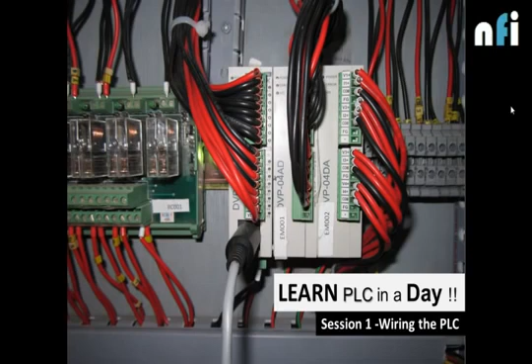Okay, so welcome to the Learn PLC in a Day session 1, which is wiring the PLC. In this session, we are going to learn about how to wire a PLC. Now, when we are going to install a PLC in any panel or in any machine or in any process, first we have to wire it up. So we'll understand how to wire a PLC, which wires are to be connected where.

So very quickly, let's understand the basic components of a PLC. Now, in front of the screen, you can see this is a PLC by the company Delta Electronics, and we have some input terminals. These are the terminals onto which we'll be connecting the inputs. Now what are the inputs? Inputs can be switches, sensors, a limit switch, any source of inputs, and it can be any sensor.

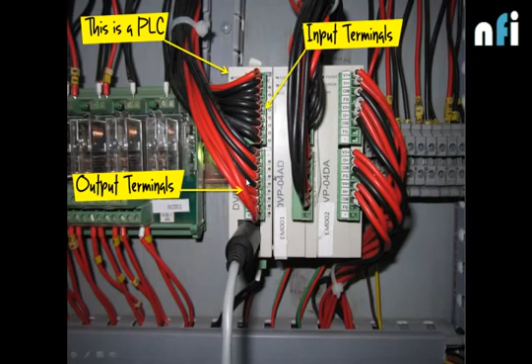Then we have the output terminals. You can see here, these are the output terminals onto which we'll be connecting the outputs. Now what outputs and what inputs there can be in any machine depends on the various processes. For example, suppose you're going in a lift. What you do, you push a button. That button is your input. That button tells the machine, the process, or the lift which floor you want to get to.

So that movement of the lift is due to the motor. That is your output. So you understand that the button is the input which will be connected to the input terminals, and the motor will be connected to the output terminals. But what happens inside is the program, how that controller has been programmed.

In a similar way, we will program this PLC using this programming cable. Now, that's the programming cable. We have to make a program in the computer, then we have to download that into this PLC, where it will remain stored. So it's all about programmable logic controller. That's what PLC stands for. Programmable logic controller. A controller which can be programmed using various logics.

Logics can be if, else, or, and, not. So that's the logic which we are using in our day-to-day life. The similar logic we can program in a PLC. Now let's see the components. We have RS485 terminals over here. This terminal is used to connect this PLC to an HMI or any other communication source so that we can communicate what's happening inside a PLC.

Then we have the D to A card. This is a digital to analog card, which converts digital data into analog signals. In this case, digital data can be binary bits. These binary bits can be converted into analog voltage, which can be further used to drive different analog outputs. Then we have the A to D card, which is analog to digital conversion. Analog signals can be given by some analog sensors.

So I'll show you another PLC from the company Siemens, with the code S7-200 CN. Similarly here we have the power, 24 VDC, which will be used to run the PLC. Then we have input terminals as we have in Delta. These are the output terminals. Then we have this programming cable which is used to program the PLC. And then a small battery. This battery is used to store the information, to store the program in case of power failure.

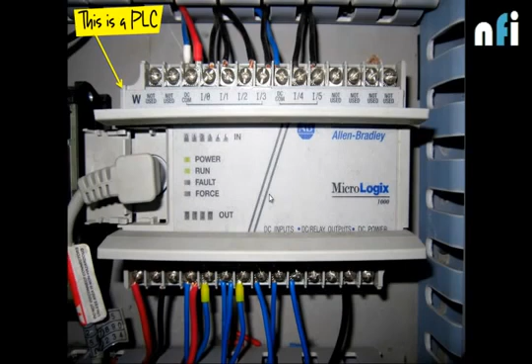Now, another PLC from the company Allen Bradley, MicroLogix 1000 is the code. Similarly, we have input terminals here, output terminals here, and again a programming cable to program the PLC. Then the power of 24 VDC, which is used to run the PLC. Now you can see some indications here. The PLC is on, you can see a green light. When it is running, you will see a green light again. When it has some fault, there will be an orange light over here.

And when there is a forced input, in which we are driving the input from inside the software instead of switches, there will be a force light here. So these are the basic components of what a PLC is all about.

Okay, so this is the software in which we are going to learn about how to wire a PLC. This software is Automation Studio by the company Famic Technologies, which is in Canada, and this software is being used in our academy to teach the students how to do the electrical wiring, how to make sophisticated circuits, and how to test and simulate them, so that after making circuits in this software, we implement them practically.

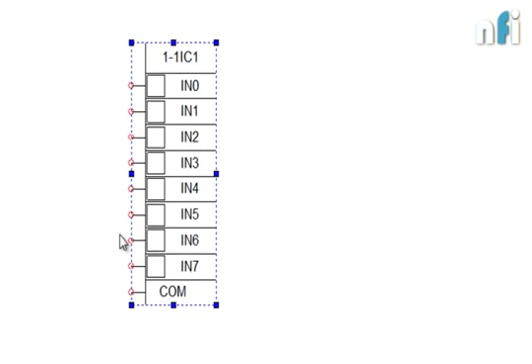So let's take some PLC cards. This is my PLC input card. It is analogous to the input terminals which you have seen in that presentation. So let's take some power sources. Now this PLC I assume is running on 24 volts. So I'll take 24 volt and I'll take 0 volt. Now as this is the software, there is no need to connect power sources to this PLC. These will be connected internally by the software. But we have to provide voltage to drive the inputs.

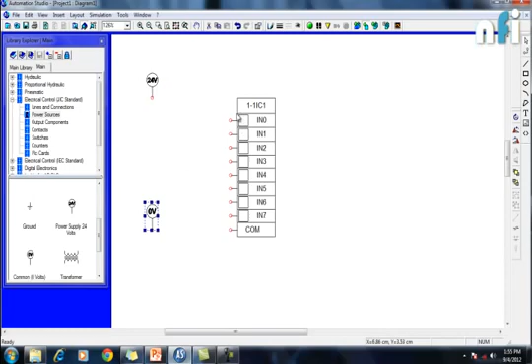So first understand how this input will be run, how they will indicate that there is some voltage or some physical activity outside this PLC. You can see a common terminal here. Now I'm going to connect this 0 volt to this common, like this. So my 0 volt has been connected to common. Now, you have to understand that we need to create a potential difference of 24 volt across these input terminals. Only then will this PLC recognize that there is some input.

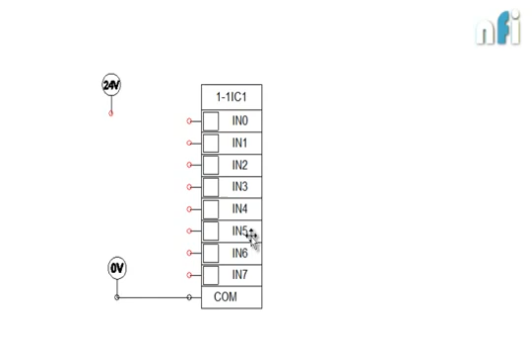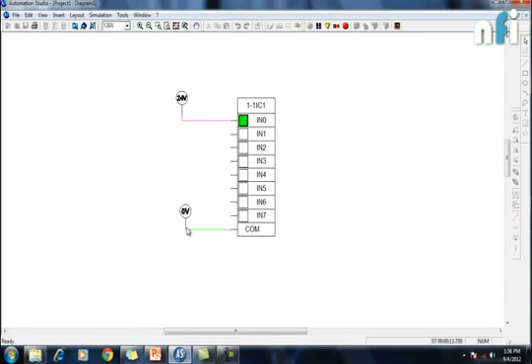For example, if I connect this 24 over here, and then I simulate that, you will see this is on. This is on because of this 24 volt and the 0 volt. This 0 volt is connected internally to this input. So we have created a potential difference of 24 volt. Now let me clear this understanding.

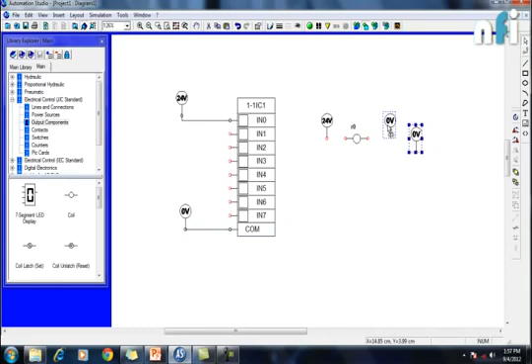Let's take a relay. For example, I'll take a coil, this one. Let's name it R0. All right. So let's take another voltage source, 24 volt, and this one. Now this is my electromagnetic relay. What happens when I provide a signal of 24 and 0 across its two terminals? You will see it is on. In a similar way, these are the internal relays of a PLC. You need to provide 24 volt potential difference across every terminal to make it on.

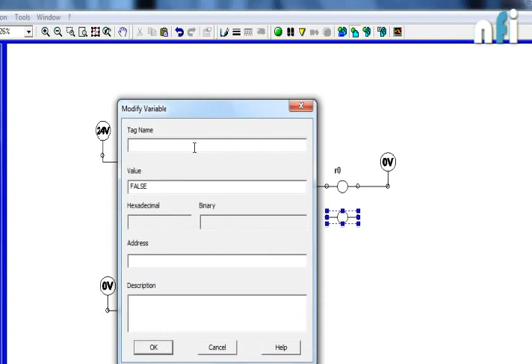So if I take another relay like this, let's name it R1. And I connect this with this and this. Okay, let's not connect it initially. Now you see, this relay is getting 24 volt potential difference. This is on and this is open from one end. Similarly, these all are open from one end. They are getting 0 volt from here, like this relay is getting from here, but 24 volt is not provided. So when I provide this 24 volt, this relay will be on.

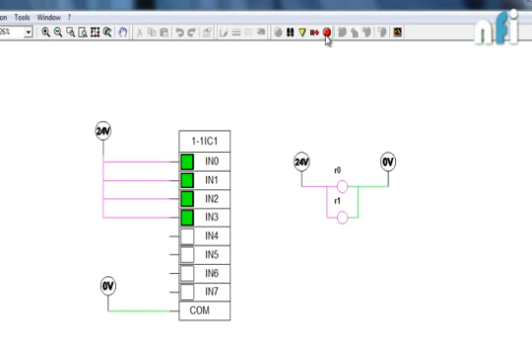You can see here. Similarly, if I connect other terminals to 24 volt, this will be on. You can see here. So the concept is we need to maintain a potential difference of 24 volt across this input and the common. Now in many PLCs, instead of 24 volt, you may find line and neutral, because that depends on the manufacturer, whether he is providing 24 volt DC inputs or AC inputs. In some PLCs, instead of 24 and 0, it is written live and neutral.

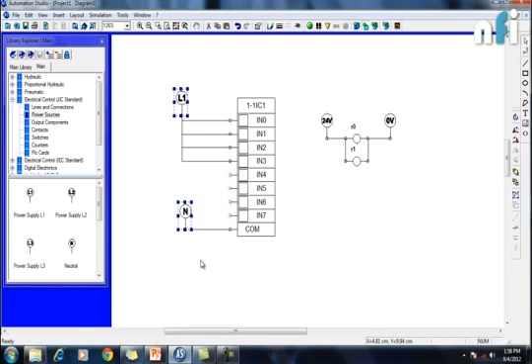So in that case, you have to give live over here, L1, and instead of 0, you have to give neutral. So this can be the case in some different PLC. So we have to check on the PLC whether it is DC voltage driven or AC voltage driven. So let's remove it for a second. Now this was my input card.

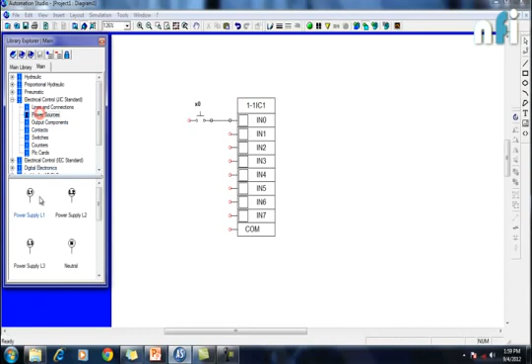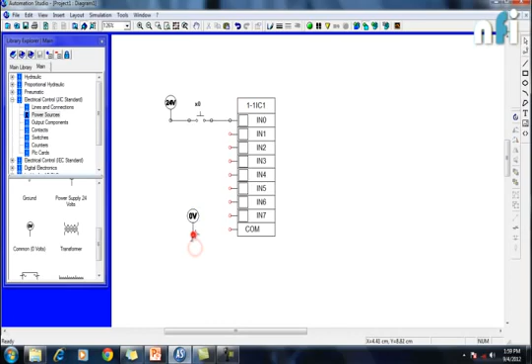I'm going to connect some input switches here. Now this is my push button. Let's call it X0. Now I've connected this to IN0 and again I need some power sources. Let's say 24 volts. Okay, so what happens if I don't connect 0 volt over here? Nothing is going to happen. It's not going to turn on because there is no potential difference. There is nothing at the common end. So we have to connect 0 volt as well. Okay, so now I've connected a switch.

This is a normally open push button, which is spring loaded. When I press this switch, the input will be on. When I release it, the input will be off. So this is an input switch. You may find such switches in your panels, in other machines. You may find some green buttons. This button is connected in this way: it is connected to an input, and the common is given 0 volt. So similarly, let's connect some other switches.

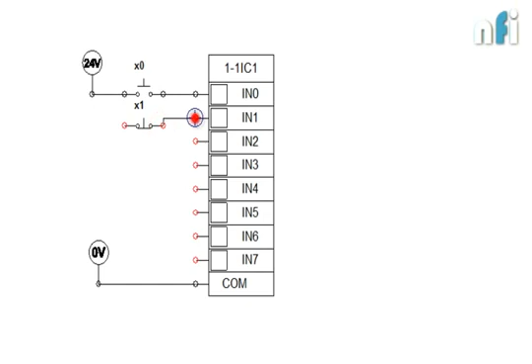This is my normally close button. As its symbol indicates, it is passing the signal in normal position. That is why it is called normally close, because the switch is closed normally. When I press this button, it will be open, and it is again spring loaded. When I release this button, it will be closed again.

And this is normally open. Normally open means when I'm not pressing this button, the circuit will be open. When I press this button, it will be closed. So these are the different types of switches which we can find in the inputs. Now let's have a toggle switch. Let's name it X2. Let's connect it to IN2, and then again this 24 volt. Some more input buttons.

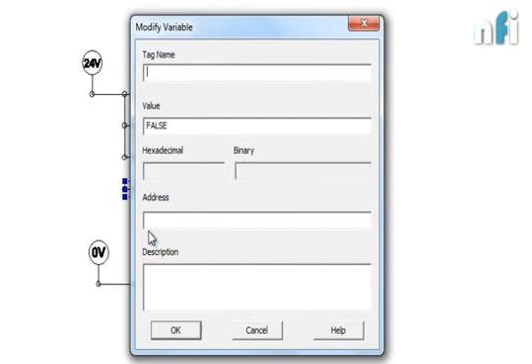These are again normally open toggle switches. Now, toggle means they are not spring loaded. They are retentive. They have retentive position. When it is open, it is open. When I close it, it will remain closed. So that's the beauty of the switch. So I have connected 4 switches.

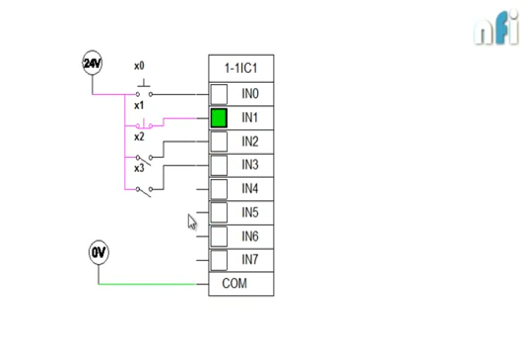Now I hope you have understood that this is on because this 24 volt is already across this terminal, IN1. This will be on when I press this button, and again, similarly with these cases. So this is my input section, how we are getting the inputs from the outer world and how this PLC is judging the inputs just by this voltage. Again, where you have potential difference, that input will be on. So this was about the input card of a PLC, or you can say input terminals of a PLC.

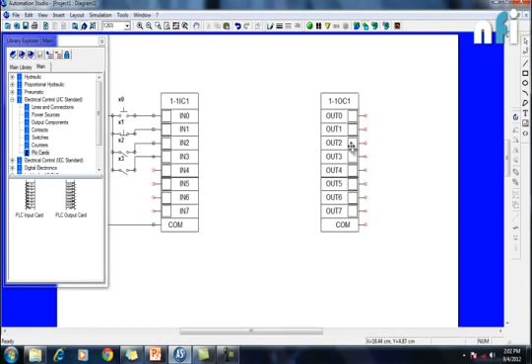Now let's see what happens at the output terminals. For that, I'm going to have this output card from here. You can see like this. Okay, so I'm placing this output card a little bit away from that to make the concept pretty easy. Similarly, we have different outputs, out 0, 1, 2, 3, 4, up to 7. Then we have a common output. Now, similarly, I'm going to connect this 0 volt. I can take the wire from here to this common output.

Now, here I'll be connecting the output components, not the switches, but the output components. So let's see what we have in output components. We have coils, LED display, coil unlatch, latch, solenoid, indicators. So let's take an indicator. Now this indicator is my light, so let's name it Y0. This is an indicator light. I'm going to connect one end of this indicator to this out 0. Now I have to give 24 volt to this other end, again to maintain the potential difference.

Now what happened here is, when I simulate that, this 24 volt travels to one end and the other end is not connected to this 0 volt. Why? Because in this case it was already connected here, but in this case it is not connected, and this will be connected only after we do the programming. It won't run when I press this button or this button, but how it will run depends on the program. So this is my output, not running right now.

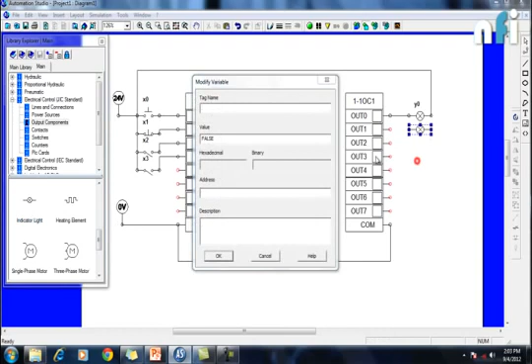Let's have some more outputs here. Let's call it Y1. Enter. So I have connected 2 outputs now. Both are not running because I haven't programmed the PLC. Now what does a program do? Program will link this input section with the output section. Suppose I want, by pressing this button, this first light should be on. I have to make the program according to that.

But if I want both outputs to be on after pressing this button, then I have to change the program. I don't have to change the wiring. I just have to change the program. Similarly, if I want that by pressing this button both should be on, I have to change the program only. Wiring is one time. Remember this. So this is all about the wiring, how we have to wire the input section and the output section. We can similarly connect some more inputs. We can connect some more outputs like this.

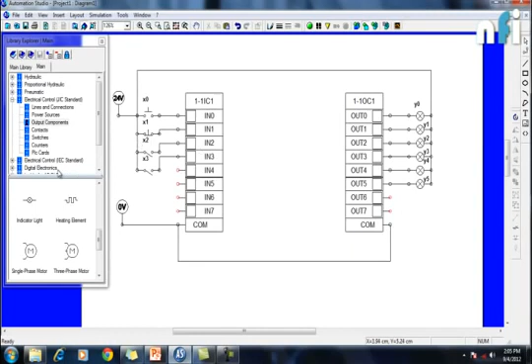So you can see here, now I've connected 6 outputs to the output section and a few inputs to the input section. Now in the next session we are going to see how to make a program, how to make these outputs glow by using programming. We are going to see how to do the programming. It's based on simple logics: OR, AND, NOT, if-else, timers, counters.

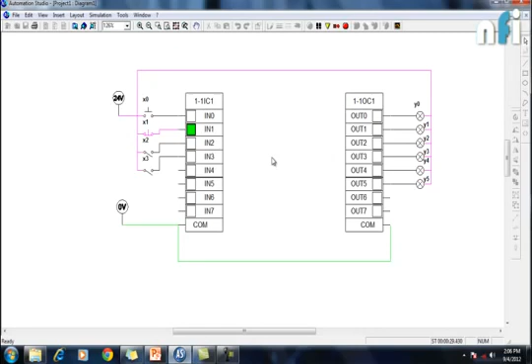So this was all about the wiring.